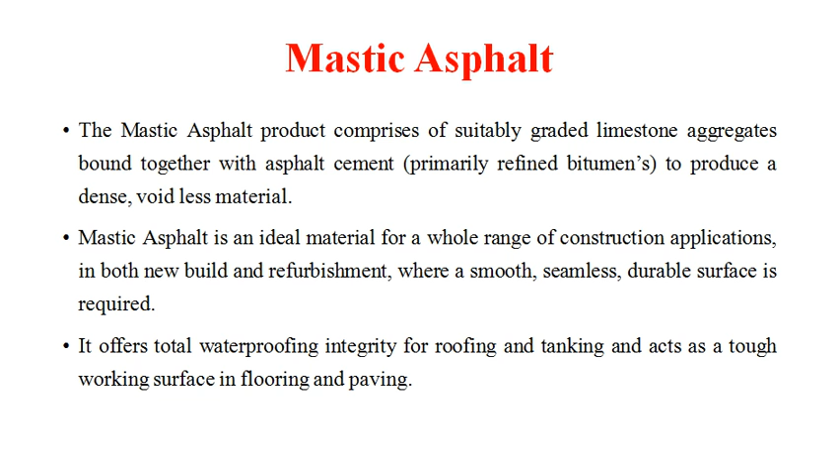Mastic asphalt is one of the most traditional materials, and it is used widely in building construction works. It offers total waterproofing integrity for roofing and tanking, and it works as a tough working surface in flooring and paving.

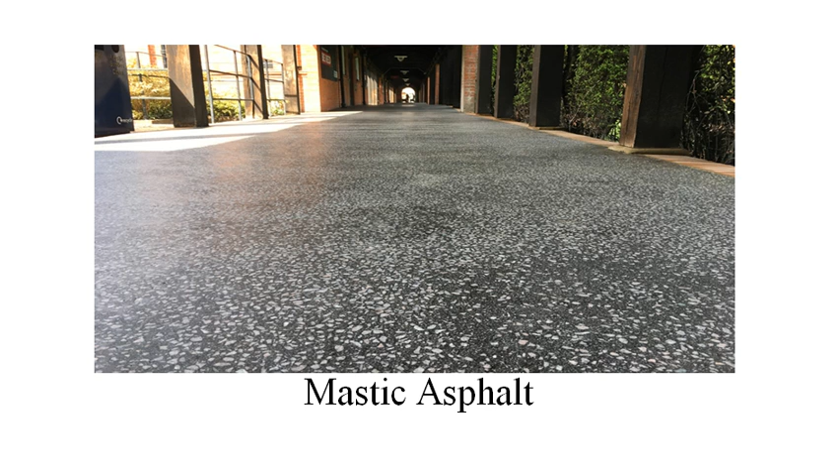Next is the cold mix asphalt technology. Cold asphalt mix is produced by mixing unheated mineral aggregate with either emulsified bitumen or foamed bitumen. Unlike hot mix asphalt, HMA, cold mix asphalt does not require any heating of the aggregates, which makes it economical and relatively pollution free, as no objectionable fumes are discharged.

Next, the production of cold asphalt mix does not require high investment in equipment, which makes it economical, and it is also suitable for use in remote areas. As no heating is required, no heating plant or fuel is required, so it makes cold mix asphalt technology more economical compared to the hot mix asphalt plant. Cold asphalt mix can be used both for initial construction and for recycling of asphalt pavements.

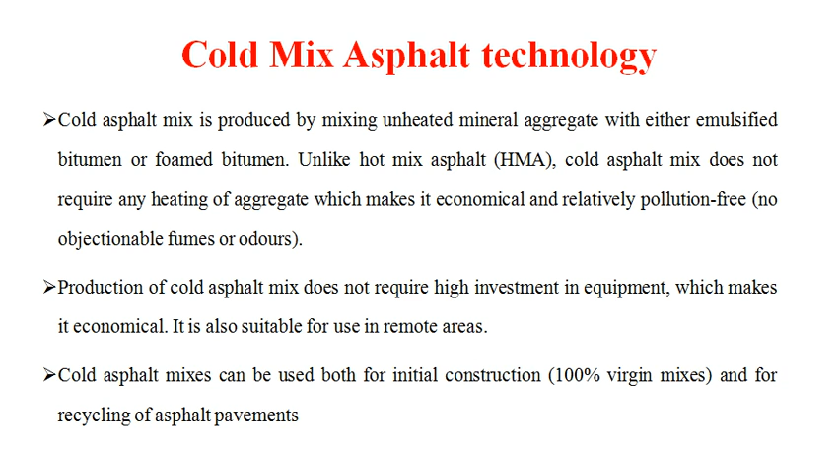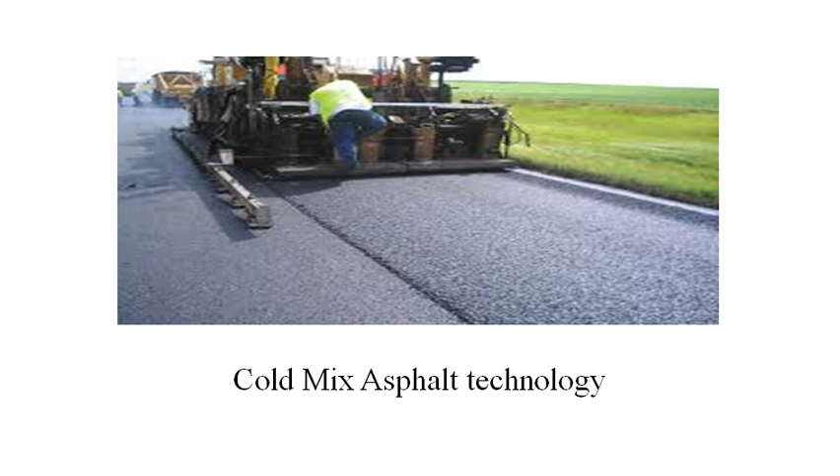So from this figure you can see the layer made using cold mix asphalt technology being laid in the construction of the pavement. Next, the mix types. Primarily there are two types of virgin cold asphalt mixes being used: first is dense graded, and second is open graded.

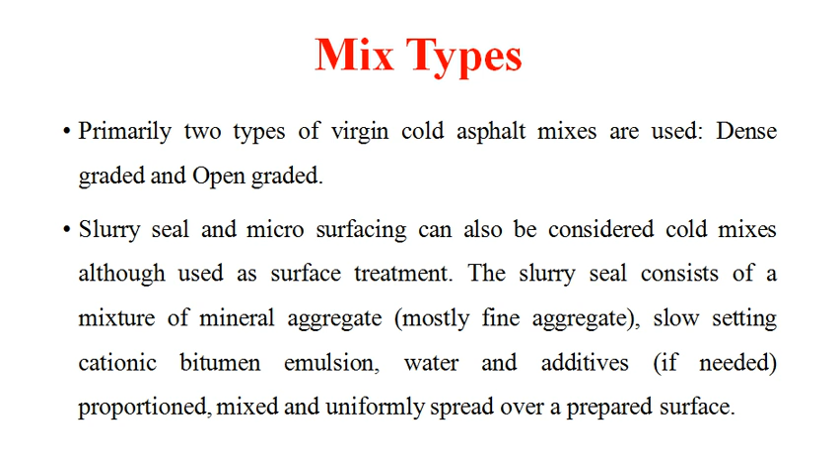Slurry seal and micro surfacing can be considered cold mixes, although they are used as a surface treatment. Slurry seal consists of a mixture of mineral aggregates, mostly fine aggregates, slow setting cationic bitumen emulsion, water and additives if required, proportioned, mixed and uniformly spread over a prepared surface.

Both slurry seal and micro surfacing have to follow application limitations, which are as follows. First, they should be used on an existing bituminous surface. The existing pavement should be structurally sound and should have good riding quality. Next, the existing bituminous surface should not have any severe distress except hairline cracks.

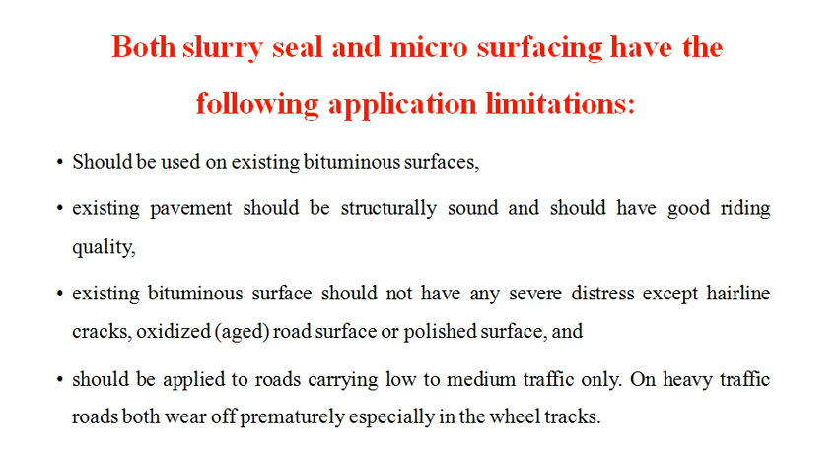Then the oxidized or aged road surface or the polished surface. Then it should be applied to roads carrying low to medium traffic only. On heavy traffic roads, both wear off prematurely, especially in the wheel tracks.

Next is the warm mix asphalt technology. Warm mix asphalt is a generic term for a variety of technologies that allow producers of hot mix asphalt pavement material to lower the temperature at which the material is mixed and placed on the road. It is a proven technology that can be used to reduce paving cost, extend the paving season, improve asphalt compaction, allow the asphalt mix to be hauled longer distances, and improve working conditions by reducing exposure to fuel emissions, fumes, and odors at the site.

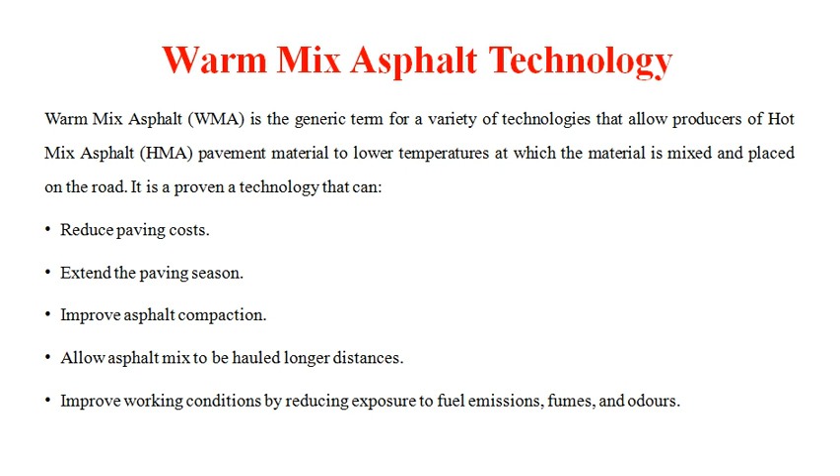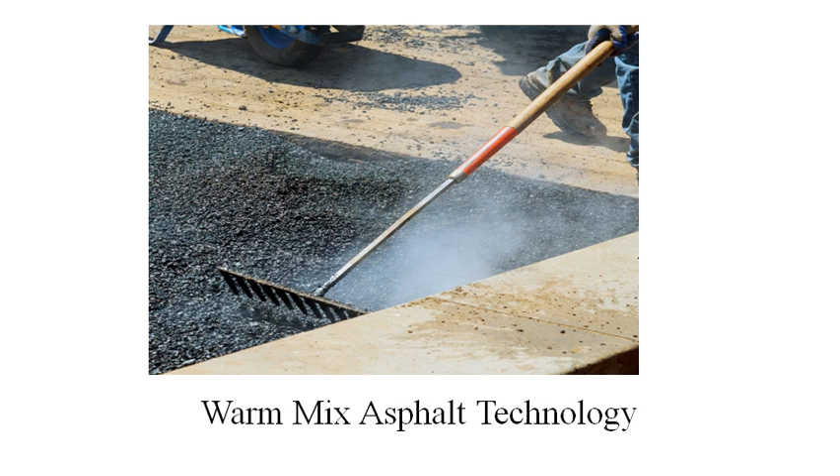This is a typical view of warm mix asphalt technology, where the warm mix of aggregate and binder is being applied on the prepared surface. The warm mix asphalt production method uses temperatures 30 to 120 degrees Fahrenheit lower than hot mix asphalt. In paving projects, the greater the temperature difference between the asphalt mix and outside temperature, the faster the mix will cool.

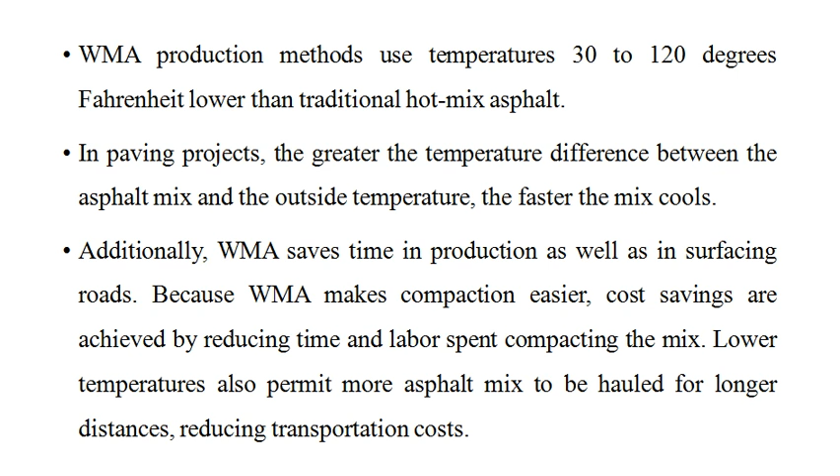Additionally, WMA saves time in production as well as in surfacing of roads. Because WMA makes compaction easier, cost savings are achieved by reducing the time and labor spent compacting the entire mix. The lower temperatures also permit more asphalt mix to be hauled for longer distances, which reduces the transportation cost.

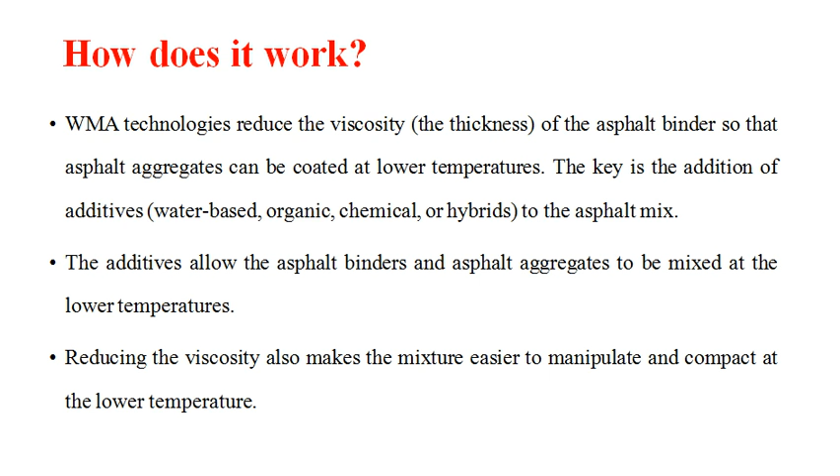So how does WMA actually work? WMA technology reduces the viscosity of the asphalt binder so that the aggregates can be coated well at lower temperatures. The key is the addition of additives, which may be water-based, organic, chemical or hybrid, to the asphalt mix. The additives allow the asphalt binder and aggregates to be mixed at low temperature, reducing the viscosity due to the heating of the binder. It also makes the mixture easier to manipulate and compact at a lower temperature.

Next is the performance. Proper compaction is critical to well performing pavements. One indication of proper compaction is density. WMA is also versatile. It can be used successfully in a range of pavement thicknesses. It is also durable enough to withstand high traffic demands, and warm mix asphalt has been used successfully in Europe for more than 10 years, and in the United States WMA projects are now in more than 40 states.

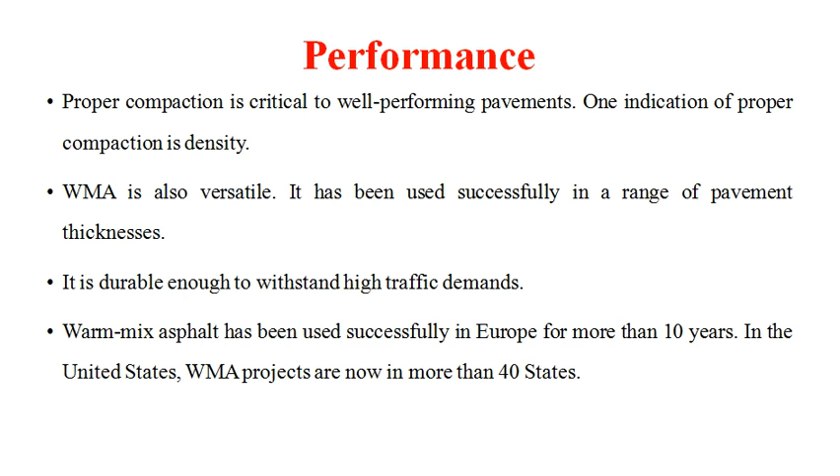This makes us understand that in countries with severe cold temperatures, mixing the asphalt and aggregate by application of heat makes the actual construction of the pavement easier, and it provides better binding properties between the aggregates through the heated binder.